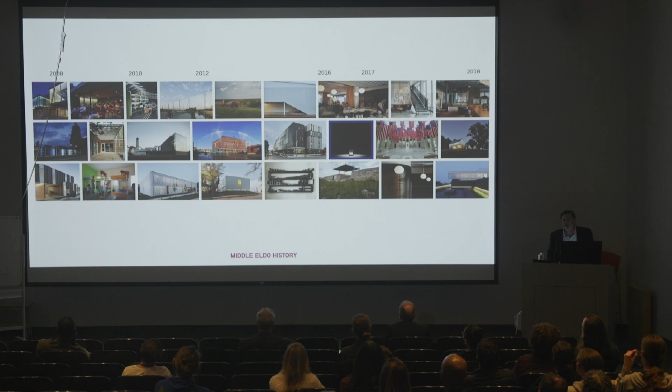Super quick visual history: we started as furniture makers and evolved. All the architects in Kansas City were like, yeah, it's great, you're furniture makers. We thought at the time they were being supportive, but really they were reinforcing the fact that we weren't architects. So it took us about 6 years to figure that out, and we pivoted hard—but as a very organic evolution in scale and complexity, to the point where now these are active projects in all these locations.

The asterisks in each of those cities mark projects I would consider to be preservation. They may not be pure, by-the-book preservation, but they might be neighborhood rejuvenation. In the case of the work in Riyadh, it might be digging into really trying to understand how to build in a contemporary way that's at least mindful of some very traditional ways of thinking about building things.

Too much to talk through, but these are the lenses that I formulated as I was thinking about the talk. The beginning, rural histories—we actually do a lot of preservation work in rural America. Material culture, as Bruce mentioned, we're really interested in how buildings are made. We make things, we've built our own buildings before, and we continue to have a hands-on engagement that seems very relevant for the work of preservation. Compare, contrast, and the future.

So the beginning, we started in a neighborhood in Kansas City called the Crossroads Arts District, wedged between downtown and Union Station. It was really a place where artists wanted to be and were. There were a lot of artists that owned buildings. We actually didn't own our own building in the neighborhood, but we were there.

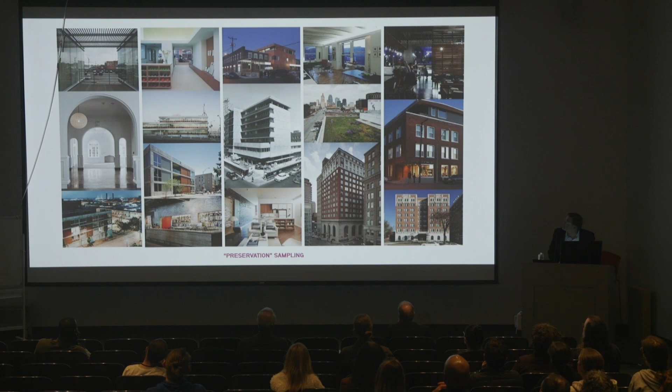On the left, Bruce mentioned that one of the pillars is working with artists. This was one of the very first retail restaurant projects in the neighborhood, and the developer trusted Jim Woodfill to develop these light signals before there was anything—before the buildings were renovated, before David Rockwell came and created our brand new Lidia's Restaurant.

Jim's light sculptures were out in this field of corn that allegedly grew when a tub of corn fell from the rails. I don't know if it's really true, but before anything was there, anybody was there, Jim's work was there, and we helped him make sure that they didn't fall down. So we often will work with artists and help them build their work.

On the right was another early project, and I really love it. We designed and built the staircase, which is something that we do quite a bit of. But for the true preservationists out there, I'm sorry—we're often looking for these kind of moments where contemporary thinking exists in equal measure with restoring historic fabric, side by side.

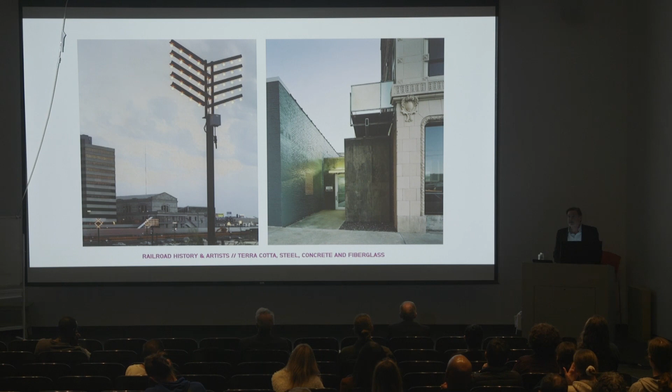We've worked on little Art Deco buildings. Across the street from the Art Deco building is the TWA building that I'll dig into in more detail, and this is a bigger facade of just a really simple building, kind of a classic infill building. Couldn't tell you who designed it, but these are everywhere.

I'm jealous every time I come to St. Louis—our version, which is a little two-story version, in St. Louis is 12 stories tall and phenomenal. So, and I now live in the Hotel Monroe across the street.

So I want to dig in a little bit on the TWA building. This is the glorious opportunity that a client of ours presented us with. This is what the building looked like—it was so effectively camouflaged, nobody ever knew it was here.

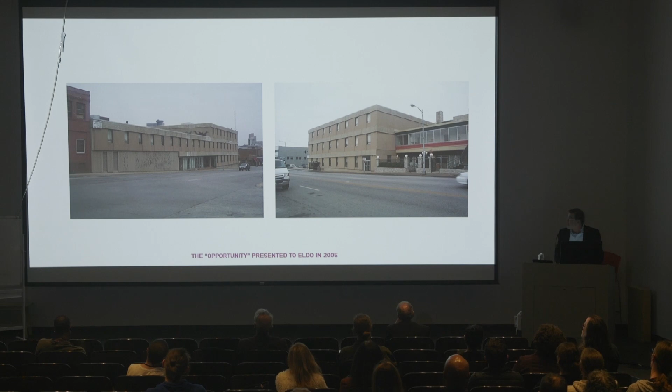And somehow, this developer had seen these photographs from the 1950s. He basically took the building. It was the first, I believe this is true, mid-century modern building to be listed that went through the state and federal historic tax credit program in the state of Missouri.

It dates from 1956, and we started renovating it. It wasn't quite 50 years old, but because of the corporate history and the significance of TWA to Kansas City, it was allowed in early.

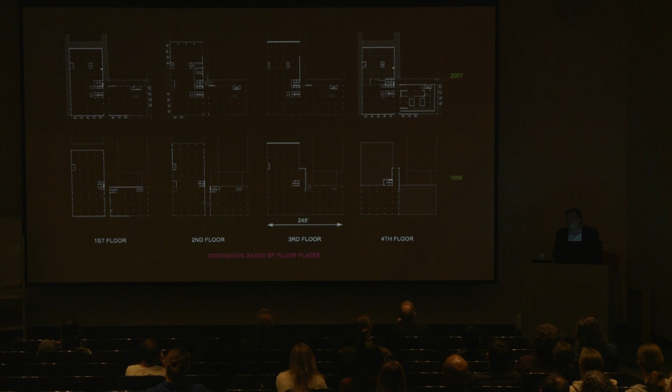So really it was a kind of a recladding—actually it's more complex than it seems, but recladding. These are the floor plan differences: essentially the alleyway cut the building in half, so the floor plates weren't consistent. This is a big building for the Crossroads, 30,000 square foot floor plates, but it didn't work with the alley splitting it.

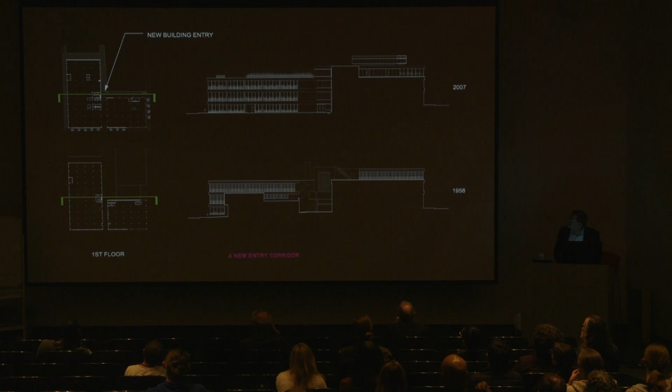So we joined it and then went about our business, created a new entryway for this kind of iconic building in a neighborhood of brick buildings—50 foot wide, 100 foot deep brick buildings. That's the context of the Crossroads.

Did you rebuild the rocket? We did. So thanks for the question. The owner of the rocket was an attorney in Columbia, Missouri, and the developer was desperate to have it. He said, just tell me what you want, I'll give you anything. And he said, you don't get it, it's mine, I have it. He took it to shows and Walt Disney appreciation events all over the country. He said, but if you want to come and measure the rocket, come and measure it and rebuild it. I mean, it was a piece of shit, the original was not in good shape. So we did. We went out, measured it, and had it rebuilt.

It's the Moonliner rocket. Howard Hughes and Walt Disney were on the board of TWA at the same time, and they all felt that TWA was going to commercialize rocket travel. So while they were on the board, they plunked the building down on the corner. What's interesting to me is this is a spec office building, and TWA became a tenant, and because of the color coding and because of the rocket, it has all this significance.

But the biggest problem with the building was that the floors were concrete, poured on top of each other and then hydraulically hoisted and welded into place, which is great, it went up in no time. Then the ribbon windows go in. But the roof was perfectly flat. And because we were so clever to get it on the National Register, we couldn't alter the profile of the roof. So the roof had to stay flat.

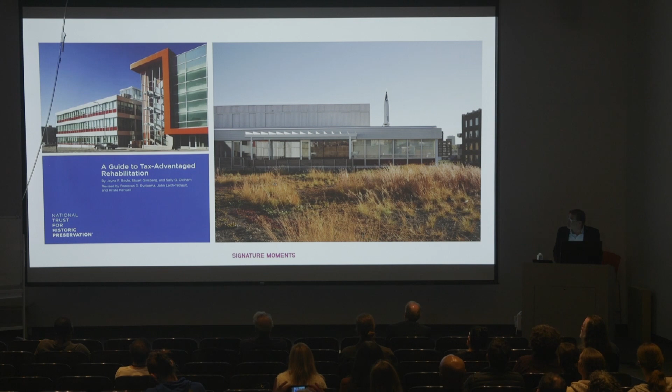So, signature moments: this is the tallgrass prairie on the north roof. And on the left, the project made it on the cover of the National Trust Guide to Tax Advantaged Rehabilitation. Barkley, a large employee-owned advertising company in Kansas City, rebranded themselves around the building. This is how they're great tenants. They've been there for as long as the building's been renovated.

Crossroads Hotel, this is another proper historic tax credit project. This one is too. Essentially, it was 2 buildings, and then it was 6 buildings, all kind of aggregated around it. Just a mess, a total mess. And really, it was the last big building in the neighborhood to be acquired and rehabbed.

This looks charming, but the metal beams and columns aren't connected, they're just resting. And the wooden beams aren't physically connected to the walls, they're just sitting there. So we were basically kicking the building to make it work as a hotel, which wasn't very nice to do, but we did it.

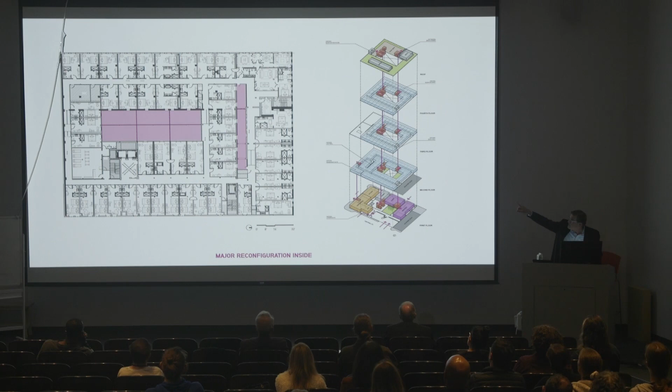This was an early vision: light touch on the outside, significant reconfiguration on the inside. I don't know if you can tell from the plan, but there's at least 4 different buildings stuck together, and then we just cut this giant hole in the middle of the building for light. Each of the pink shapes is where we needed to get light to every room.

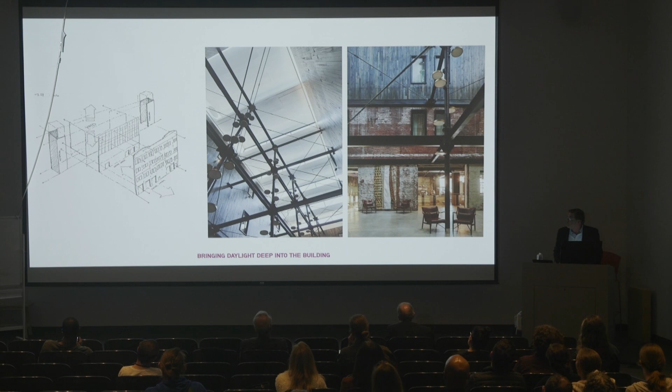That's the space on the left, and what we did in the meantime, because this was all covered up, we revealed the back of the original building inside this big courtyard space. It ended up being a really beautiful opportunity to show people the way the building was assembled over time.

Weird columns like this, we just said, the columns win. The walls, we don't want to screw it up, although I noticed that just left of the register, it looks like we crowded that piece of the column. We were really interested in trying to find a nice way for what we need now to rest easy with what was existing. So that's the before and after.

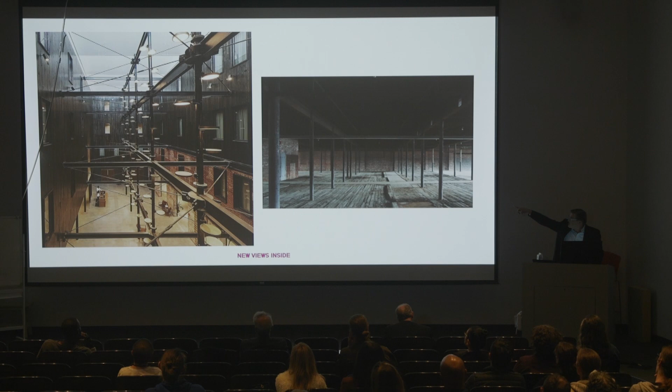Another thing we do: the hotel has an artist residency program that's run with now the director of the Contemporary Arts Museum Houston, who was a partner of ours for a little while. We had a curator who was a partner for 2 years, and every 3-4 months there's a new artist in residence who has a show. When you walk into the building, the gallery is to the right and the bar is to the left, so you've got everything you need.

Rural histories. I'm going to run through this really quickly because I feel like I'm not moving quickly enough.

A partner of mine was asked to teach a studio at K-State by the dean, Tim DeNoble, and without consulting his partners, he agreed to do it. He hadn't taught before, and not only was it a big challenge to begin with, but it was a design-build studio. So he said, well, why don't you run a studio modeled after El Dorado? And he agreed. So I thought, okay, I'd taught a little bit, I'll run with him. Three weeks into the semester, Doug said, I'm out, I'm not doing this, I don't want to teach. So I've been doing it nonstop since 2011.

One of the great things about it is going out to Manhattan, which is really in the middle of everywhere. It's in a beautiful landscape, and there are all these amazing little jewel towns and stories throughout the Flint Hills of Kansas. Manhattan is about 2 hours west of Kansas City, and Volland is a town of 1 person now — it used to be 2. A client of ours managed to essentially buy all of the buildings in Volland, which sounds like a big thing, but there's like 6 buildings.

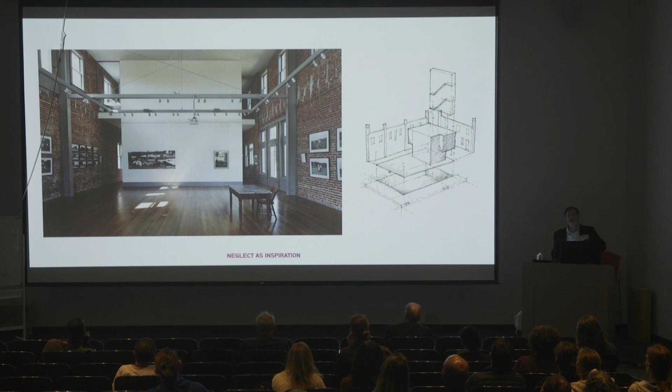Patty wanted us to build it back exactly the way that it was. So we spent a lot of time in that volume thinking it would be amazing if, from the outside, people think it's just a general store, but on the inside it's something bigger, something unexpected. So this is now a cultural arts center with really robust programming inside and outside — they have rodeos, they have plays outside. It's really become an important part of the community again.

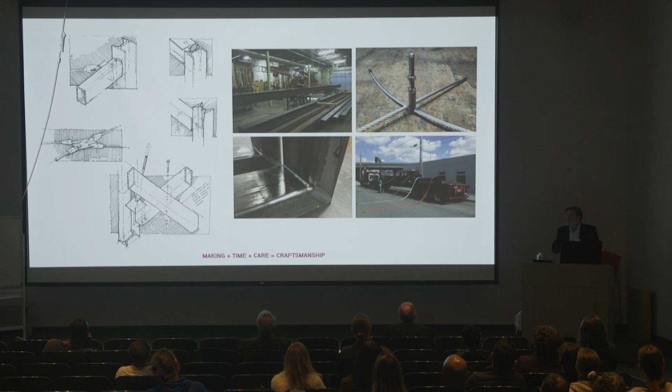This is 100 years apart. On the left, that was the town of Volland, and on the right — with the exception of me, Patty, and Jerry Reese, who own the building — everybody in the photograph has a relative who was in that photograph on the left.

So there it is. I'll never forget, Carol Ross Barney was a juror for the AIA Kansas City Design Awards one year, and she loved this project and said, architects need to do this more often. You can't even tell the architect was there. There's a light touch, and it's exactly right.

Another project in the country, this is a little bit more, well, we wanted to make sure that the original, it's actually not the original house, but the signature house was not overwhelmed by an addition on the back, which is much bigger based on the size of people.

This is the location of the house. It's right in the middle of what was originally the tallgrass prairie in North America, and that darker green section is what's left. There's 4% left, and we're right in the middle of it.

This is where I spend my weekends, so I never really get tired of the landscape. But I really love this idea of approximately similar, same shape, same form, roof pitch is a little bit different, but basically when people squint, they're like, oh yeah, it's the same building. That's the interior.

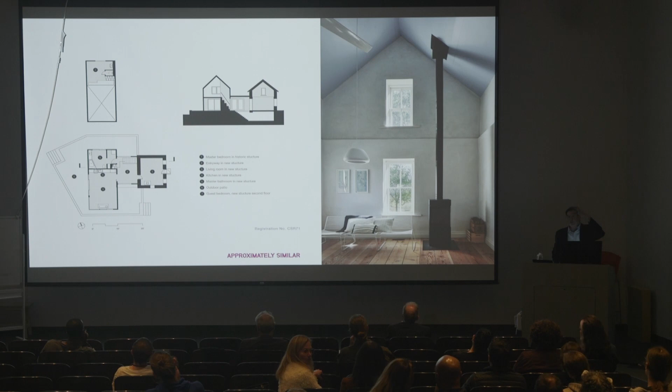We gutted the original house, just opened it up, and that's the bedroom. It's a beautiful space, and that's kind of the partner in crime in new construction. It really is—the vertical section is designed around the scale of people and moving upstairs.

There's also windows, light—really important. People out here were running from the wind, which is maddening. But the light quality is really amazing. The new building is essentially a light tube that opens up to that big window on the corner, and when you're upstairs in the guest loft, you have a really great light condition.

But subtle contrast and direct dialogue, little punched windows, one big window, metal, stone, et cetera—it just never gets tiring. But craft is everywhere. The front corner of the building, the historic house, the craftsmanship is okay. It's not like some of the other buildings in the area, but the corners are dressed and they're perfect, in perfectly good condition.

So we felt like we needed to do a version of that on our own, which was using 2x12 Doug fir, recycled in a well-crafted way, and then a nice handrail designed and built by El Dorado.

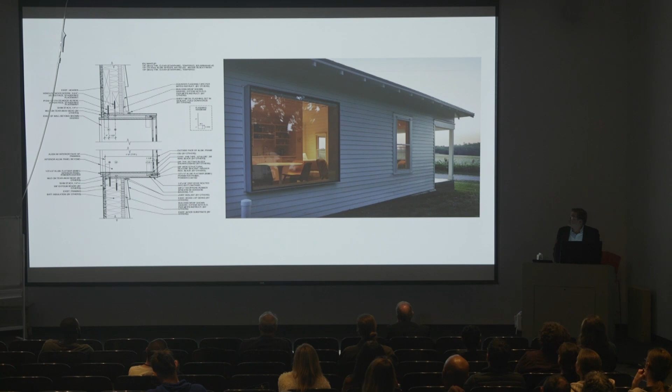I spent most of COVID working from here. It was really great. So it's just classic American classic, not symmetrical. Okay, and then scale shift—I don't want you to think we just work on little things.

This is a whole block in downtown Denver.

And we worked with BOKA Powell as the architect of record.

So for context, there's a whole block, and there's a piece of a building left in the middle of the block that's the Regional Transportation District. Gehl Studio worked with our client on an urban design framework - that's the 16th Street Mall, and then the street that butts into Union Station. Our block was a perfect opportunity to create a crisscross pattern. Denver has these amazing alleyways that split the blocks, but they're used for trash. Gehl said, why don't we turn it into something like this, so you don't just have retail and street level activation on the perimeter - you can run it around each one of these little buildings.

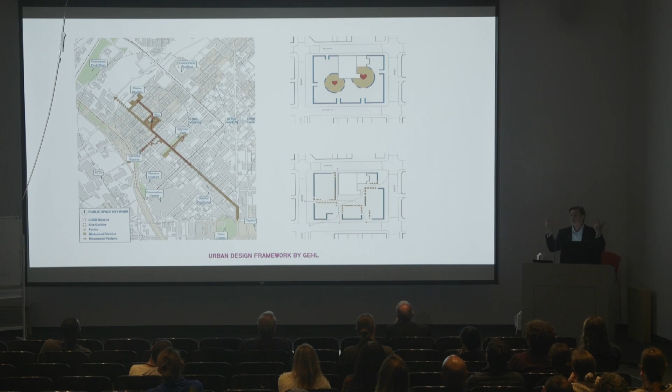We had to deal with the Lodo Design Review Committee. They asked what we were doing with brick. I said, well, what about this and steel? Or what about this and - well, what are you going to do in brick? What about this and glass? We were totally avoiding the use of brick. Then finally we just said, you know what, they're not going to let us. This is why we're accidental, reluctant preservationists.

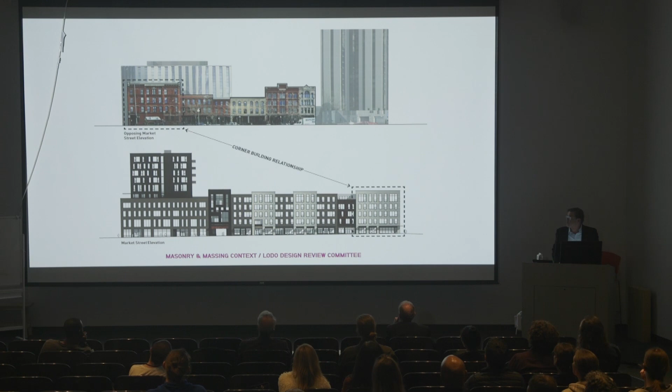But once we embraced the notion that it had to be made of brick, we went crazy and started working with the Gallegos brothers, masons - really great masons in Denver, who are also our client. We learned a lot of things. Like in school, we always learned you can't have a brick cantilever like this because of ice, it's bad for the brick. But if the brick is well made and the wall cavity drains properly, of course you can do this. So we were like, this is amazing - 20 different patterns, and we went kind of berserk with the patterns.

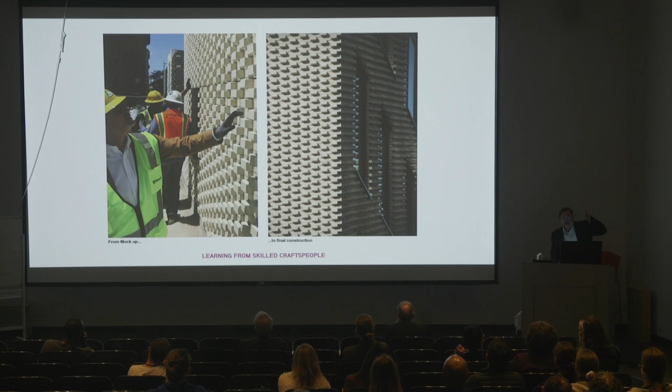The city of Denver said, this is great, we love that you now love brick, but we have rock climbers, and you can't do this on your building in downtown Denver. So for the first 12 feet it's some other pattern, and then we were able to do what we wanted to do up high. It was just a very systematic kind of investigation of what's possible.

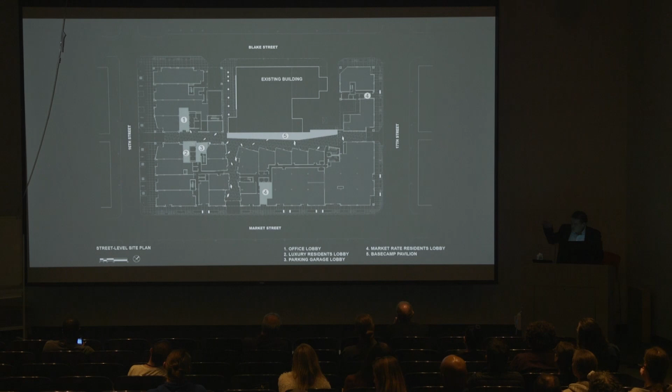There's the finished plan with the interior space, which is now called Base Camp. And then up above, it's housing and office space.

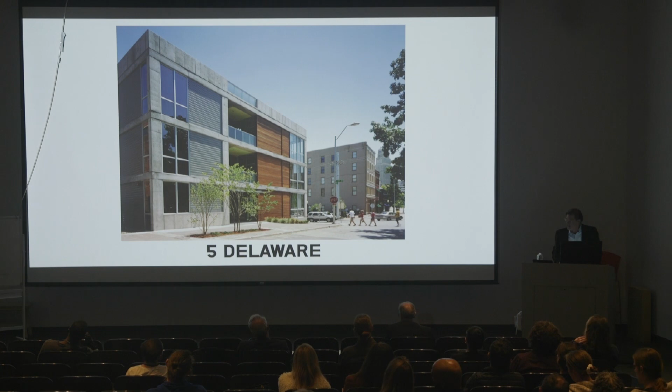Okay, so compare, contrast. This is a story about gangsters in downtown Kansas City. The River Market - you've seen Fargo and Ozark, the mafia in Kansas City is a real thing - and they had a lot of activity in the River Market, which is this neighborhood right up against the Missouri River.

You see the empty lots are not knocked down for parking - they're buildings that were either blown up or that fell down. The site we built on, somebody cut a secret passageway between two buildings, didn't treat the lintel properly, and the building collapsed. So when we started working on the project, we were dealing with an empty lot, and everybody was freaked out. This was one of the very first new infill buildings in the River Market, and people knew who we were - accidental preservationists, reluctant preservationists - and they were sure we were going to screw it up.

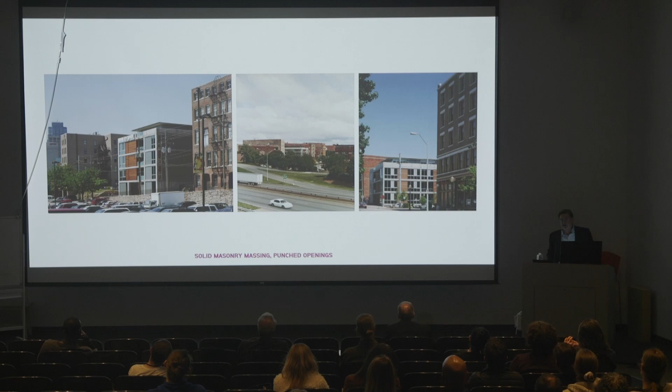So we really looked carefully at things like window patterns and openings, the rhythm of the buildings and the scale. Lo and behold, when the building was finished, everybody said, this is great, this is the standard, this is what we need. This is probably 18 years old, and I think it's holding up pretty well.

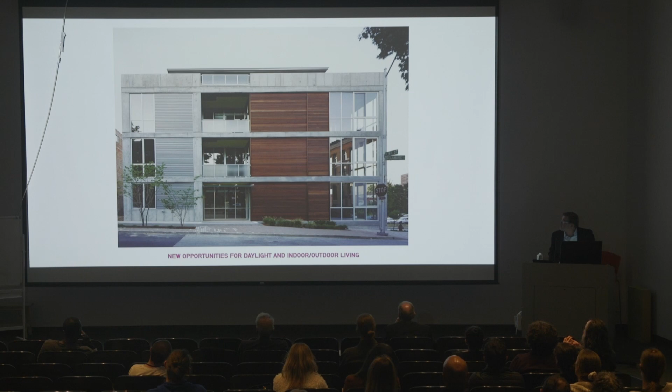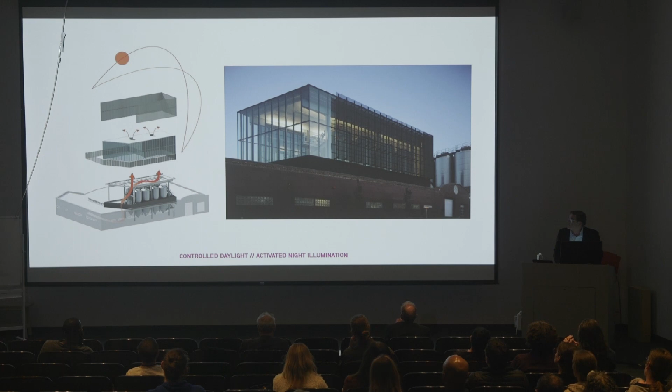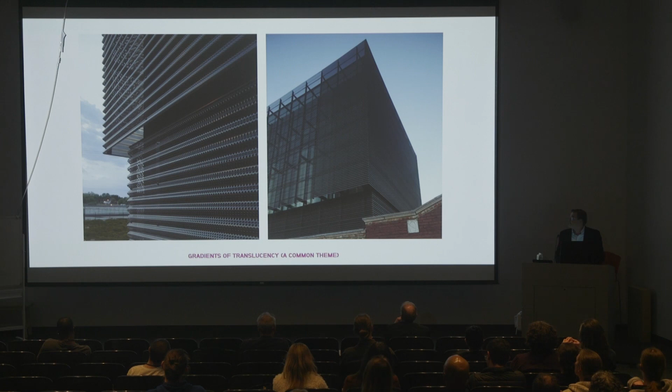It brings really great light down into the depths of the brewery, and at night it becomes a beacon to what they do. We were also the general contractor on this project. We understood the logistics of moving the steel in and out so well that at one point the owner said, 'You guys have been talking about this forever, why don't you just build it?' So we said, 'All right, we'll do that.' And we did. This facade system, this way of thinking about layered facades, has become something you'll see in other projects as well. But the section's just really beautiful. It's a really nice project.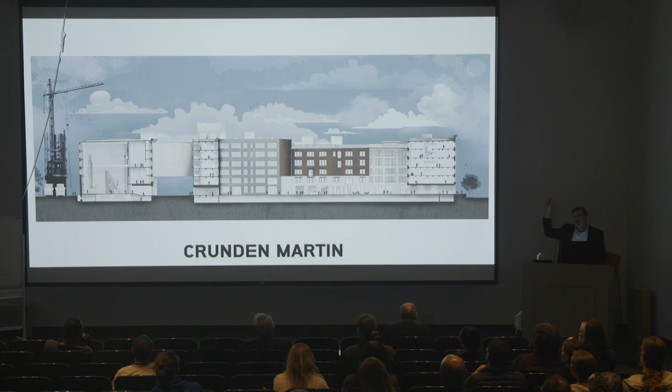Okay, so Crunden Martin, perfect timing—here we are. This is a section through the Crunden Martin building, west and east. Is Greg here? There's Greg—that's our client, Greg Gleischer with Good Developments Group. Snuck in somewhere along the line. I told Greg I was going to say whatever I wanted about his project, but the sections are great. I love the sections of this building, especially on the far left, which is the building that's been burned. So we get to have a proper preservation project. I'm going to mention it here—this is our team across the bottom.

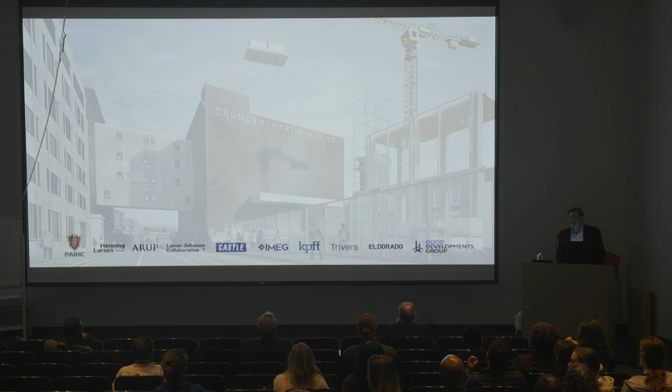I want to make sure to give everybody credit: Trivers is working with us, KPFF, IMEG, Castle, Lamar Johnson, Arup, Henning Larsen, PARIC—everybody. It takes everybody to get this project done. We just submitted 100% construction drawings, and construction begins in June. Initial construction at the end of the month. So it's happening—it's really happening. We've been working on this for a while.

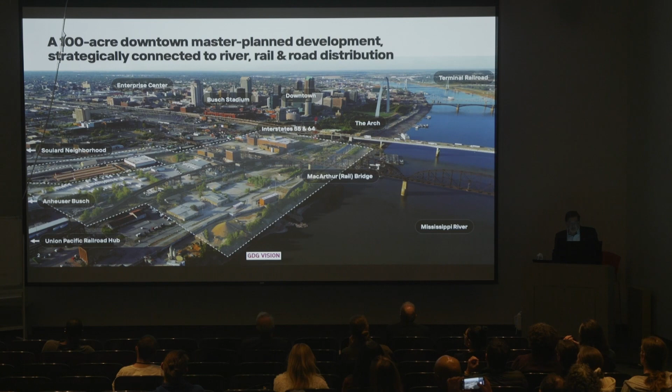I'm going to run through this, Greg—I'll do the best I can here—but this is the vision of GDG for this district: a master plan development strategically connected to river, rail, and road distribution. When I first met Greg, he talked about it as a construction innovation district, which, as we thought about it more, meant it's also a design innovation district and an education and community innovation district. All those things have to work together if this is going to be successful. But it really is—St. Louis and Kansas City are similar, although St. Louis has the benefit of the Mississippi River, which has a bigger reach. It's really strategically positioned for advanced manufacturing, or even just manufacturing.

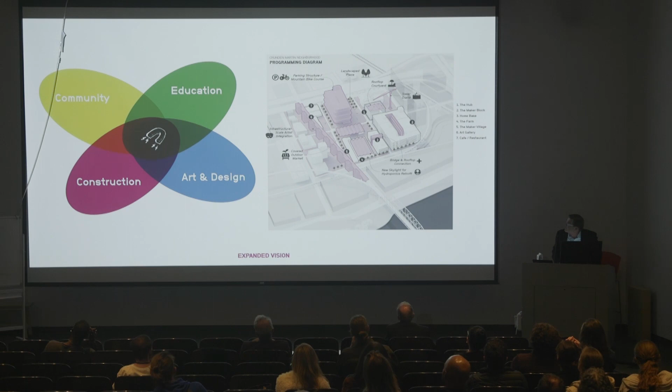So Gateway South offers the promise of really attacking some major systemic problems. This is our diagram where we added art and design, community, and education into the mix. This was our version when we were trying to convince Greg that we were worth it—we overperformed and went ahead and master planned his district for him.

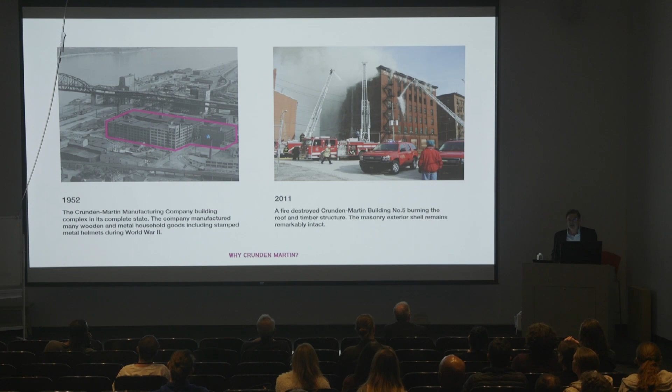Our structural engineer Joe Carpenter with KPFF—we're all freaked out and worried, and he's like, no, we're good. I love the plan too.

There's this rail spur that runs into the middle of the bigger building, and that becomes the entry to the building. So you basically enter through these little doors, little passageways, and everybody funnels into this—we call it the spur.

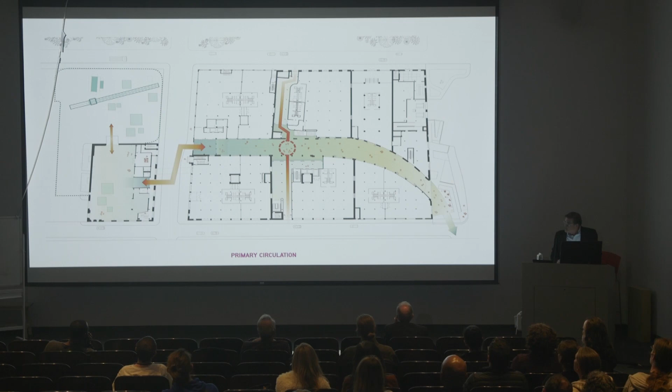It's just an amazing building. There's nothing special about it, and there's everything special about it. You guys have amazing buildings. These are few and far between in Kansas City, but they're everywhere here.

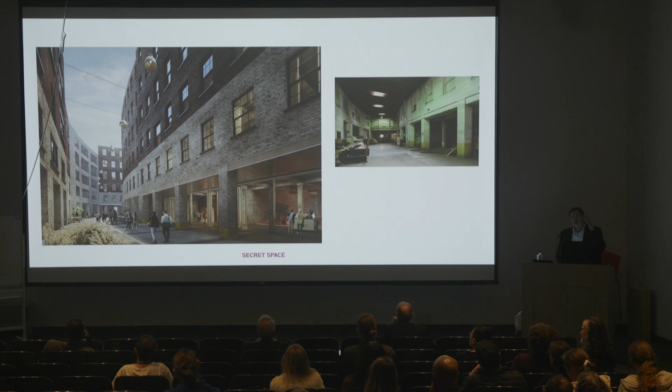This is what, if you go to the building now, you see on the right. It's been lidded over, so it's kind of hard to tell what it is, but it's this amazing Italian hill town in the middle of a building in St. Louis. So that becomes the core entry space and circulation space for the building.

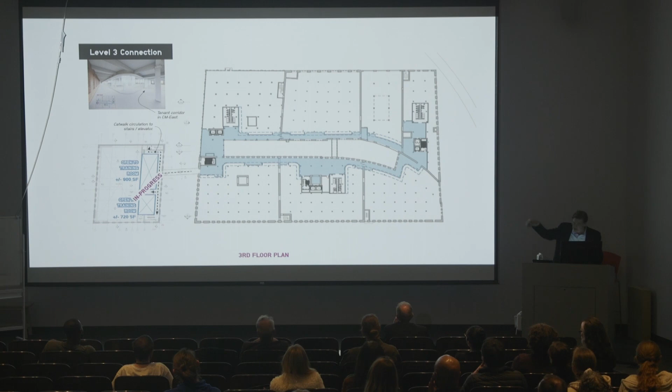We've organized circulation on the upper floors around this space, and there's a sky bridge that connects you to the other building as well. Whoops, went the wrong way.

These are what the corridors will look like. This is the entry on the riverside. The arch really isn't there—it's a little bit to the left. For those of you who are nitpicking, I'll just cut you off right now.

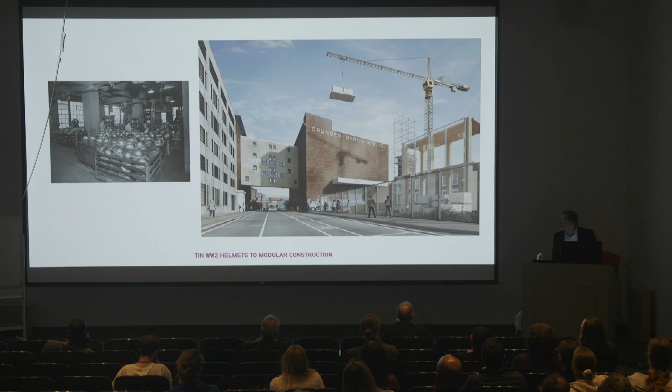Just an amazing history—it was always a manufacturing building. They manufactured helmets, they manufactured paper lunch bags. There's a great story about Charlie Chaplin—they wanted to get his likeness on a bag, and they had to ask Charlie Chaplin for permission, and they eventually got it.

But it's an amazing history. So the benefit of the building having been burned is we get to do this with it, and they're all creditable expenses. So we're just really excited about this space.

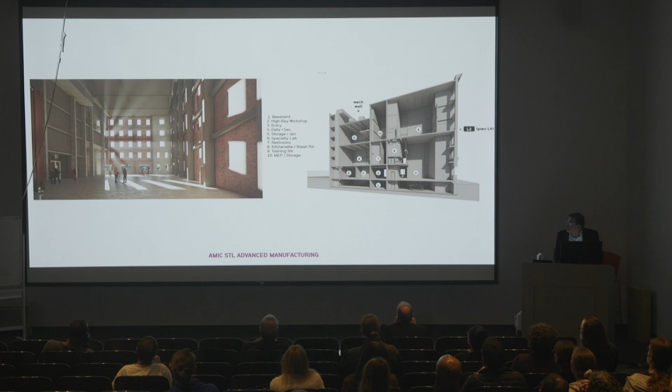So this is like the next level Volland store, for the people that worked there. This is just a quick sample.

This is some of our work with Bruce's studio and my studio at Kansas State, where they're making material cubes, which sounds really simple, like a first-year problem, but they've really done some amazing things, and they've learned a lot about things like the weight of aluminum.

In the middle, last semester, we spent time trying to consider where the material library might be. This semester, we're focused on the students being essentially the first occupants of the material library—what do they need, how do they work?

I just wanted to close on this slide because I love the triptych of stewardship, ethos. This is a public service announcement from the 80s from the National Trust. The greenest thing you can do is nothing, first of all, and then the next greenest thing is rehab an old building.

ARUP is helping us really understand some of the metrics around what we're doing in terms of carbon footprint and embodied energy continuation. In the middle, craft quality.

This is the stair that we built, a little glimpse of it. Just the idea of craft—100 years after the original building was built out of masonry, how those things come together. And on the right, this is a building in Kansas City that Mac Properties hired us to renovate.

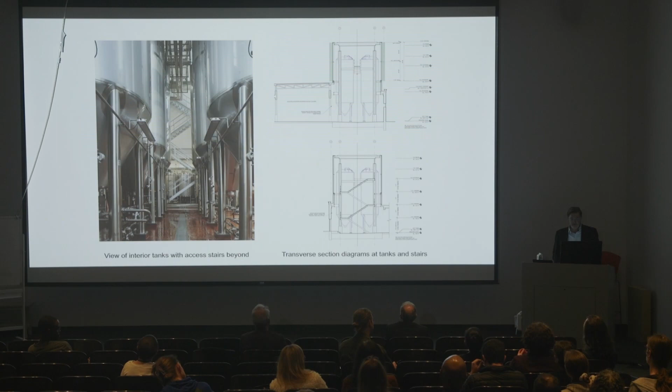This is regarding the kit houses. We just bought a house for my mother, and the walls are non-existent—they don't seem to have any. Do you have any advice for hanging things on those walls in the kit houses, before we get into the deep end of the pool?

Well, I would recommend, first of all, if it's really a proper kit house like this, I don't think there's that kind of framing—it's so thin. The perimeter framing should be different than the interior framing. What we learned is the interior stuff is not load bearing, it's throwaway, so we thought, let's throw it away. But then that's when we needed the tension ties to make sure the walls didn't pop out. Once we did that, we asked, what do you need on the inside to live comfortably? Putting grab bars in the bathroom, the screw went straight through to the other room.

So yeah, you have to rethink your walls. That's my advice—rethink your walls.

The fact that you guys do metal fabrication, how has that affected how you design buildings, if at all?

Greg asked how steel fabrication has influenced the way we think about designing buildings. Well, the reason we started doing it was we were tired of really nice handrails being value-engineered out of every single one of our projects when we were working for somebody else. So we said, we're going to figure out why that keeps happening.

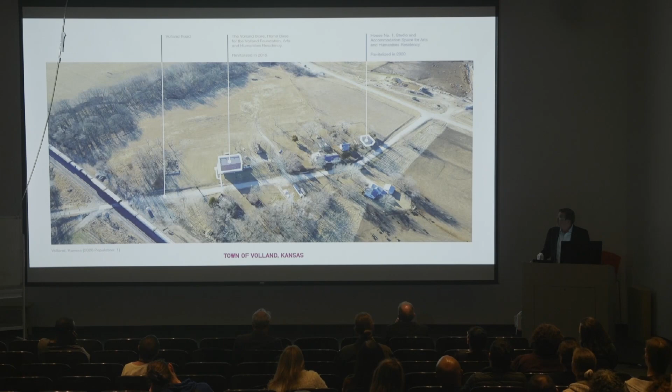It's just like you insert one piece of infrastructure and it organizes everything. You've got a utility room on the back, privacy for the bathroom on the left, a kitchen, living room, and bedroom, all defined by just the insertion of one cube into the space.

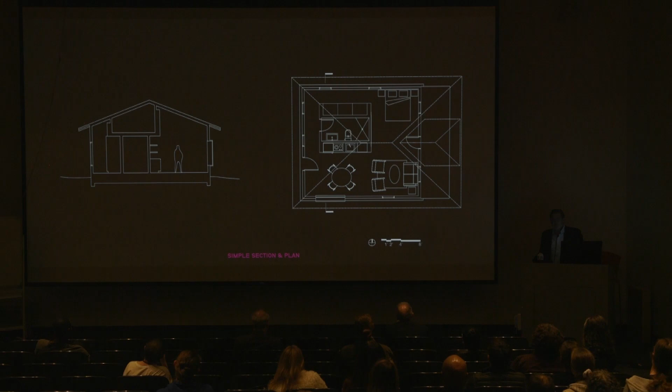It just makes for really incredible interior space—just sitting in here all day during COVID and watching the light come in and move around the space was incredible.

I want to know who's going to make a 2x2 cube of light—that's what I'm waiting for. Nobody's taken on that challenge yet.

James Strauss is coming next week. He's going to show students how to do it.

A follow-up to the craft question, the change over time and how long it takes to get stuff built, which you're responding to—really exciting innovation. How do you marry the fact that, hopefully, we'll go from 10 years to 2 years, but we want to maintain craft in the future of construction?

Yeah, that's a good question, and there are people in the room probably better equipped than I am to answer it. That question terrifies me, keeps me up, because we're engaged in slow craft, handcraft. If we were in Mexico, we'd have a bright future perhaps, but here I think the speed—we have to engage in the process, and we are.

We have a client in Portland, Project PDX, and he has his own manufacturing plant. It's a panelized system called Madomi, and we are helping him figure out how to make that work without sacrificing craft.

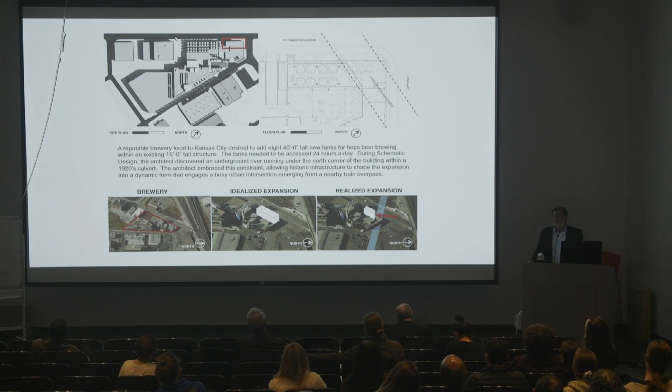When we get into really significant issues of preservation, Trivers is doing the window rehabilitation package for the Crunden Martin buildings, for example. If there's really a specific important interior preservation issue, we'll bring in specialists. We're really not specialists in preservation ourselves—we just know how to pull all the pieces together and hopefully create room for the experts to do their work. But paint color and paint sheens are just never-ending topics.

We're rehabbing a mid-century modern dorm at the University of Arkansas right now, Yocum Hall. There's two of them—Humphreys and Yocum right next to each other. The students call them Humpty Dumpty. Humphreys hasn't been touched since 1962, not touched at all—like the electricians won't go near the electrical closet. But it's a great reference because the terrazzo floor is amazing, and some of the detailing is incredible, so we can look at it while renovating the other one that's been kind of bastardized over time.

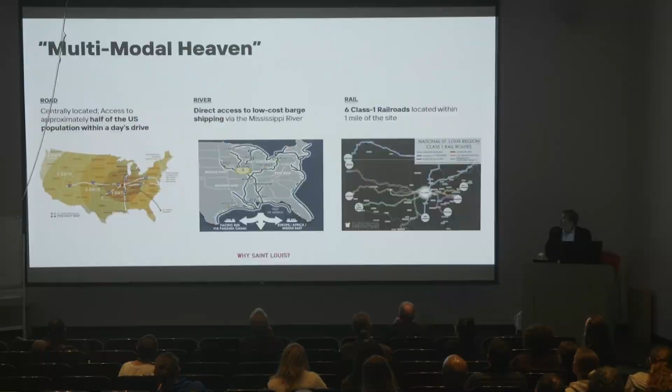Well, first of all, we didn't know what we were doing, which is probably a key ingredient. I grew up in Kansas City, so it was easy for me to be there. In this neighborhood, people were just kind of showing up in an impromptu way.

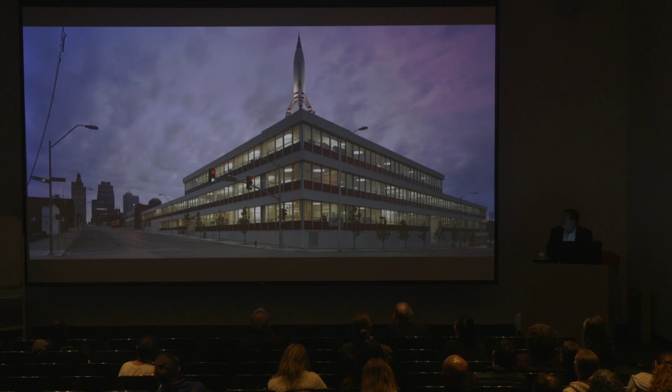So the opportunity was there — nobody was doing it, I mean, there are good firms in Kansas City, of course: Steve Abend Singleton, BNIM, all the sports architecture firms, Hufft is there. But...

The TWA building was a key moment. It signified that the community was ready for something else. So we were kind of waiting, looking for that clue. And when that happened, we're like, we're all in. We're going to do it.

We were friends. We hung out all the time. There were 5 partners and a total of 7 people in the company, so it took us about 15 years to figure out that's not a good ratio. But there were just these opportunities.